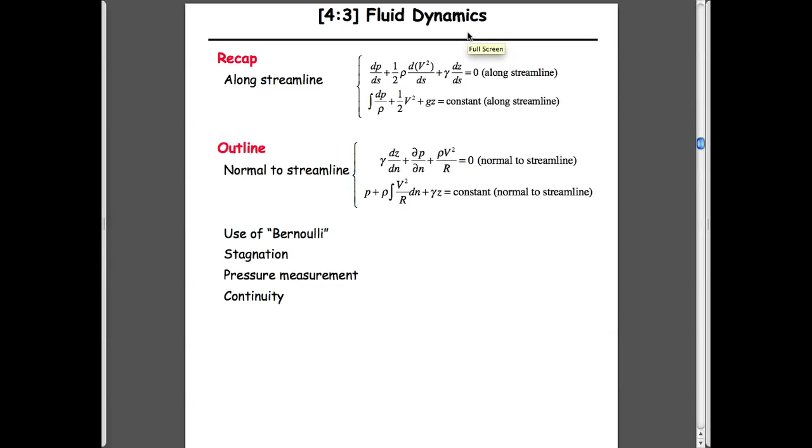So what I want to do today is talk a little bit about Bernoulli, as we dealt with last time. Talk about Bernoulli not in a straight line, but perpendicular to streamlines, and then talk about these individual components here in terms of how we use it: stagnation points for calculating pressures, how we measure pressures, and continuity. So we won't get through all of that, I'm sure.

But let's just regather our thoughts from where we were last time. If you remember, the main event for us was that we figured out exactly what this expression was. And what we could do, if we wanted to, the more usual way to look at this, I think, is if you divide through everything by g.

In which case this becomes 1, and you end up with, if you ignore the integral—the reason for this integral is if unit weight isn't constant with pressure, as it is in a gas, then you have to account for that. But if the fluid is incompressible, which is one of the requirements for Bernoulli, then this integral is just P over the unit weight, right?

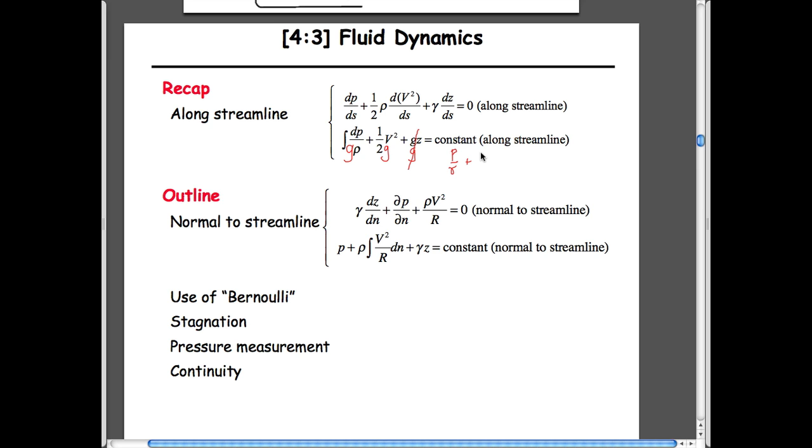And so we can also write this as pressure divided by unit weight plus V squared over 2G plus elevation, Z, is constant.

And so what that refers to is that along a streamline, as you go, you could calculate the value of this magnitude here, the magnitude of this combined term, and they should both equal the same physical amount. So the idea typically is, if you know the behavior at this point, you could calculate one missing parameter at the other location, because you know that they're equal to each other.

And that's what we're attempting to do. We'll apply that a little later to the Jackass video, just to figure out exactly what the unknowns are in that system.

So the other part of what we'd like to do is say what happens if, instead of going along a streamline like we do here, we have some kind of parallel streamline and want to go from one location to another.

And what's different here is, in this particular case, you can imagine that if you look at this, there's some kind of radius of rotation. And in the same way that we did the tennis ball thing—I won't get there—if you think about this, it's physically rotating around a point.

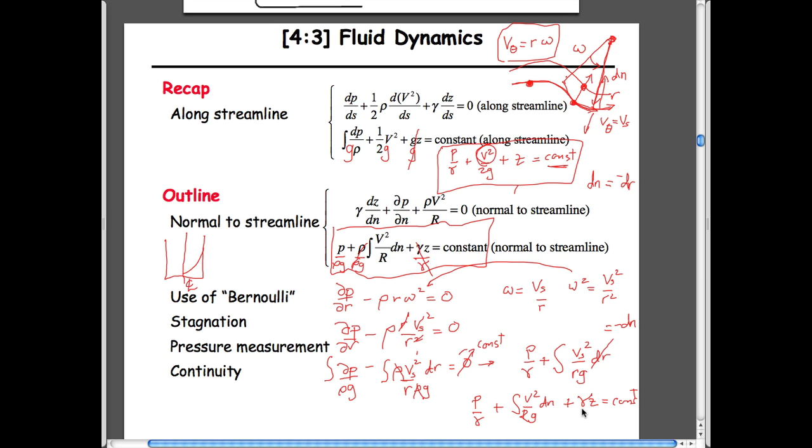Oh, so there should be density there. That's your... oh yeah, okay. So if you divide this through by rho g, divide this through by rho g, divide this through by rho g, which is actually unit weight, then you end up losing this. You end up losing this, and this is p over unit weight. So this is the same. This is v squared over rg, times dn, and this is unit weight. Okay, is that what you're telling me? Yeah. Thank you. Okay, so good. Excellent, good.

And so this is basically the same analogous expression to the linear one, but it means that if we hop from one streamline to another, we can calculate the changes in pressures typically as we go from one to the other. That's basically all it is. So the two forms of Bernoulli that we'll use are for in a straight line, and perpendicular to the flow lines.

The first expressions in each of these are just written in differential terms, so it's rates of change. Basically they say that the rate of change of pressure—if you change the pressure in the system, you also have to either increase the velocity or increase the elevation to compensate for it.

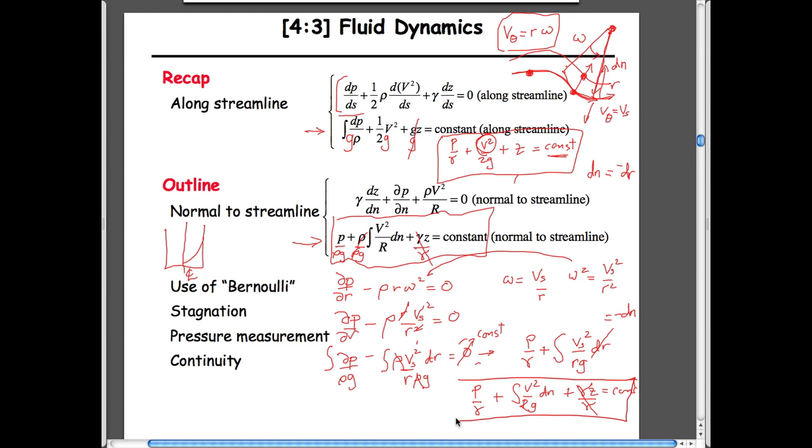So sometimes we might want to use them in differential form, but by far the better use of these is in this format. That's just a simpler way of getting to the end point. This is an important expression for us to use, which I'll explain exactly what it means as we go through this.

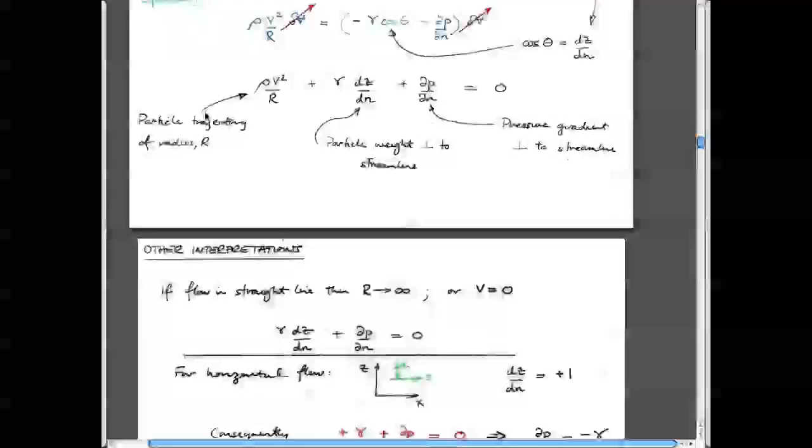So what did I want to... I guess it's in this, right? So let's move on a little bit. It means we don't have to worry about this page so much. But let's look at what this physically means in a physical sense.

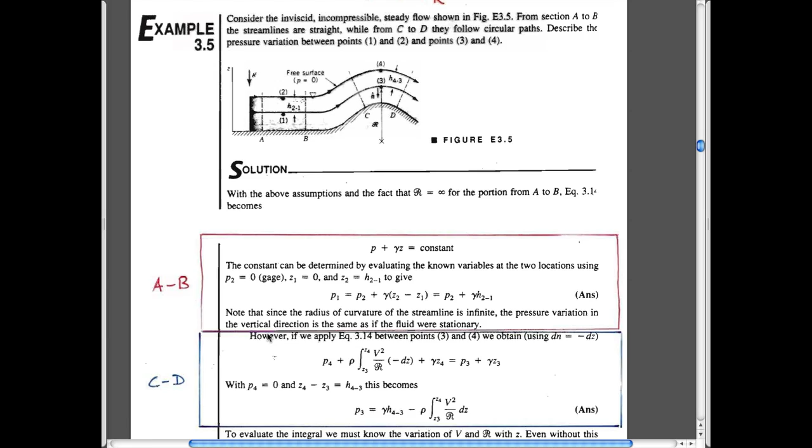So this brings in the analogy of the guy on the ski jump, or the Mini Cooper on the ski jump—imagine you're going along a road in a car, and that's fine. You're happy going down the road. Gravity acting on you is the same as it would be here.

But what happens when you go up over a bump? You know that as you go over a bump, if you go too fast, you get airborne, and so gravity is reduced, because you're being thrown up in the air.

So the question is, how would you calculate, for instance, how the pressure changes as you move up in this fluid? In this fluid, since we know it's just moving in a straight line with no rotation, we would expect that the pressure distribution here would be equal to what?

Unit weight times the depth, as we used it. In other words, in this expression, the rate of change of pressure—we've used this before—dP/dz equals minus the unit weight, which if you integrate, gives us this expression. So if you're in this flowing fluid, not static anymore, you'd expect that the fluid pressure here would vary with the unit weight of water. I'm not going to prove that, but this little proof does here.

What you can do is switch across streamlines, using the magnitude of the radius of curvature to show that. So we're going to do a little example to figure out exactly what the change in fluid pressure is as we go across here. Is it equal to P equals H times the unit weight?

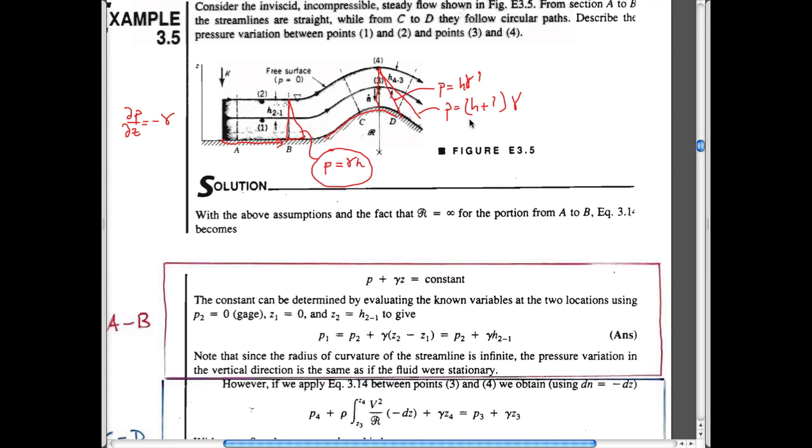This little piece of the notes explores that, but let's do it in more detail, because I think this is important. This is to try and explain using the expression we just got—well, we divided through by unit weight, but let's not do that here. So this is the expression we just got.

What we can do is write that expression on one streamline—this is one streamline that goes here, and a parallel streamline going through here. Our quest is to figure out exactly how pressure changes as we go from one point to another. Our reason for doing that is, if we know the pressure here has to be atmospheric—pressure 4 is atmospheric—if we know this, then hopefully we can figure out exactly what P3 is, the pressure at this point.

So what we can do is write Bernoulli's expression with this curvature in it for these two points. We can write it at point 4, which is just this expression here—this is the expression we just derived.

So it would be the pressure at this point, which we actually know is atmospheric, but let's not worry about that yet. It would be the density of the fluid that's flowing. It would be the radius, average radius of curvature. So some average radius, from the center of curvature here to some middling point.

We can get the magnitude of this integral from this. In fact, what we'd like to do is call this R4, and this R3, right? These are all on a circular arc, so we can get this.

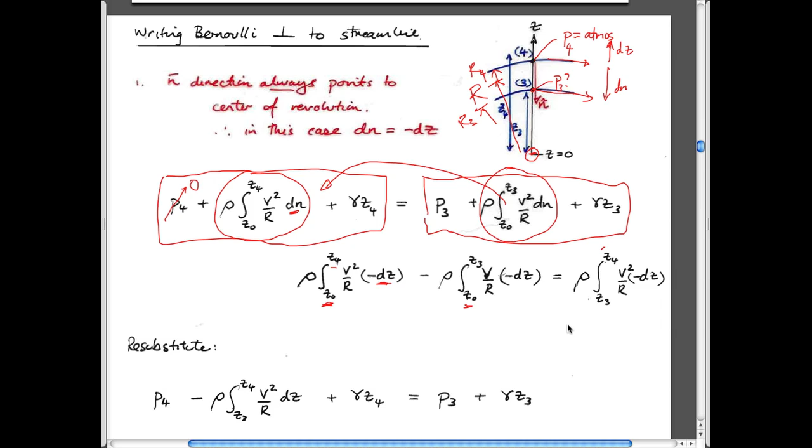So if you have some function and you're evaluating it between z3 and z4, then the integral from z0 to this point here is just the area under this curve. So in other words, the integral z0 to z4 is just this ringed area.

The integral z0 to z3 is this area. I know I can't do it much better, but you can probably do this better. This is the integral z0 to z3 dz, whatever that function is. And so subtracting them from each other physically is this area here. That's all it is.

So it's the integral evaluated between these limits. It's good to get a physical feel for what this integral is. That's all it is, it's adding up the area underneath that distribution. I wish I had some better colors, but I hope you get the idea.

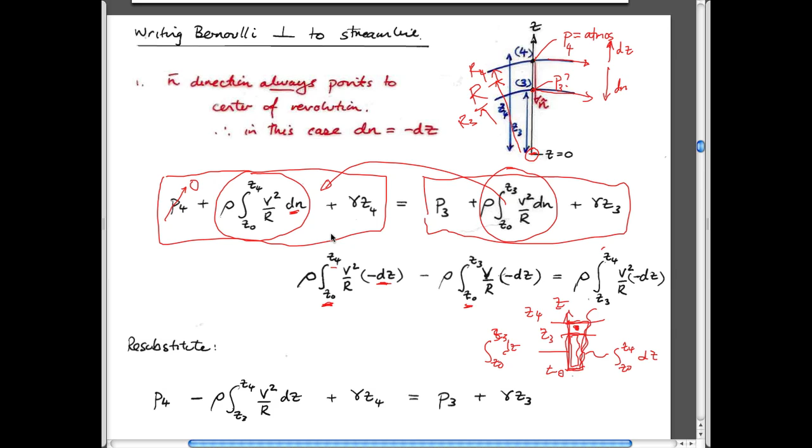So we can replace these two integrals with this one, and if we do that resubstitution, we end up with this expression here. What else can we do with this?

Well, we said that this is on the upper surface. In other words, remember it looked like this: this was point 4, this is point 3. Pressure at 4 we said was equal to atmospheric, so this is equal to 0.

We don't know what this is. This is what we're interested in finding out. And so what we can do is rearrange it. We know that P4 is 0.

We know that Z4 and Z3 are just different by this height, which is H3,4, right? It's just the separation between those places in the Z direction, the vertical direction, which we have here, which we know if we know the geometry. And so we can resubstitute it in terms of this one parameter we want.

And if we use that, then what we see is that the pressure at that point is equal to the unit weight of the fluid times the depth, which is normally the case if we just have a static fluid, right?

So this is point 4, this is point 3, and all this is saying is that if this is pressure, then P equals gamma H. That's exactly the same as a static fluid, but there's this extra term added onto it.

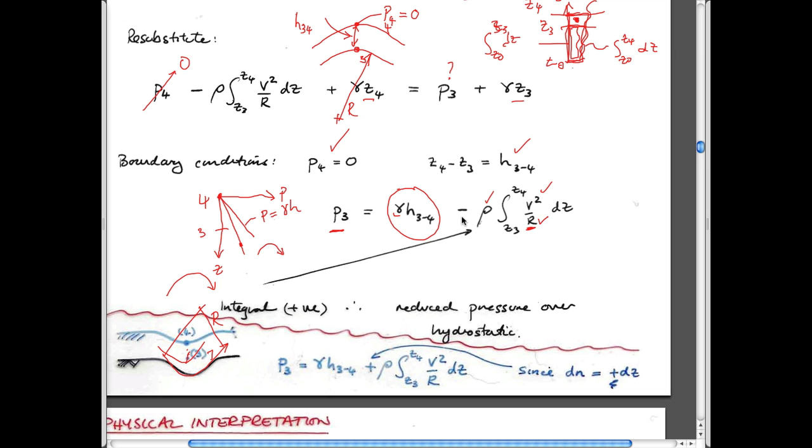And so in that particular case... didn't want to do that. Well, I guess that solved it.

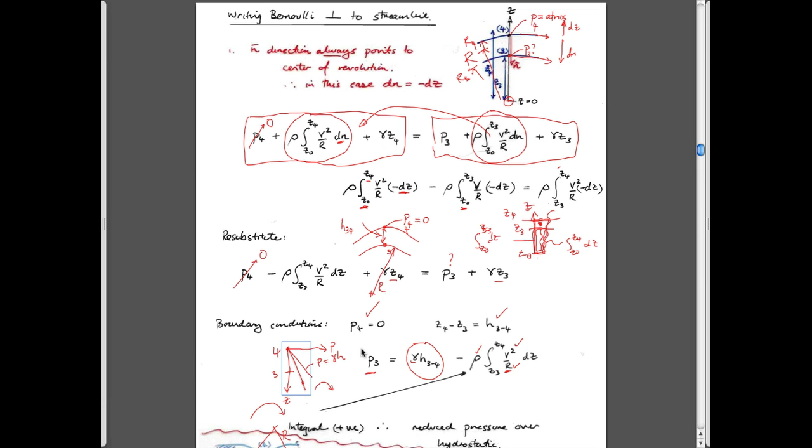Full screen. And so if that were the case, then the magnitude of this term is positive. And so physically what that would look like would be this. So this would be for going into a hollow and coming back out, and it kind of makes sense.

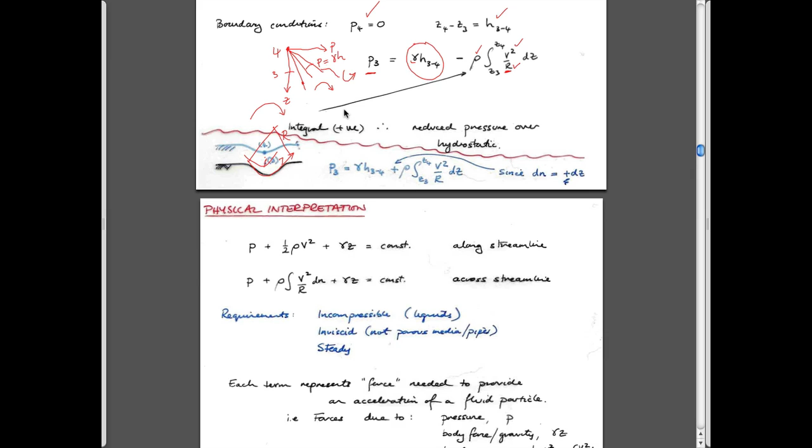What we haven't said is what the fluid pressure distribution would be if you are just going parallel to each other. We've alluded to the fact that it might be equal to the static case, but we haven't really shown that. But now we have enough information to show that, because we know this is a function of the radius of curvature.

If the flow is horizontal and the streamlines are parallel to each other, then the radius of curvature is infinite. So when r goes to infinity, this term disappears because it's vanishingly small. And if that's the case, the pressure distribution will just be the linear pressure distribution that we have in a static fluid. The fluid is not static, it's flowing from your left to your right, but the pressure distribution will be that.

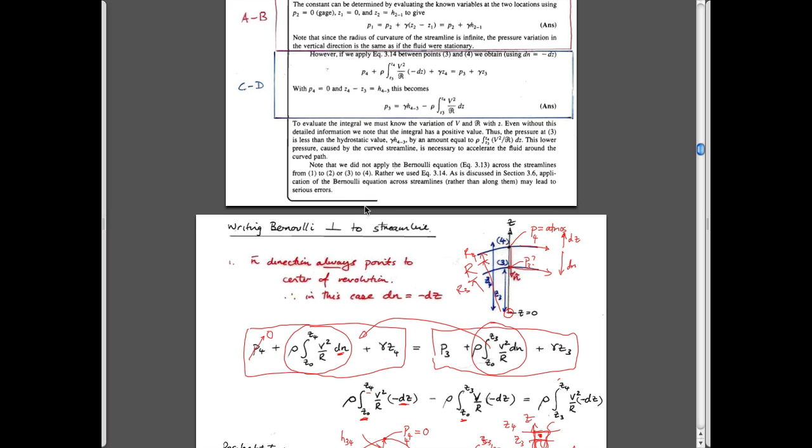And so that's why this expression, while not particularly straightforward, is an important expression for us to use. This is the expression that we've used, this is all we've used, so make sure that you realize exactly what this means.

The important things to realize, I think, are that the coordinate system that we use is always this, that there's a z direction which is always upwards, and there's a radius, which is always perpendicular to the streamline.

There's a velocity along that streamline, which is always v sub s. If you want to, you can call that v sub s. It's not the velocity perpendicular to the streamline. This is one streamline here, this is another streamline here. It can't be the velocity perpendicular to the streamline because there is no velocity perpendicular to the streamline, right?

If you're going in a car at 5 miles an hour, the velocity of the car perpendicular to you is 0, if you're attached to the streamline. So the flow direction is along the streamline only; there is no velocity in this direction. This is the streamline velocity, and this is the radius from the center of rotation, the angle of rotation of this thing, which is this point here. R is always positive, and the direction is always perpendicular to this.

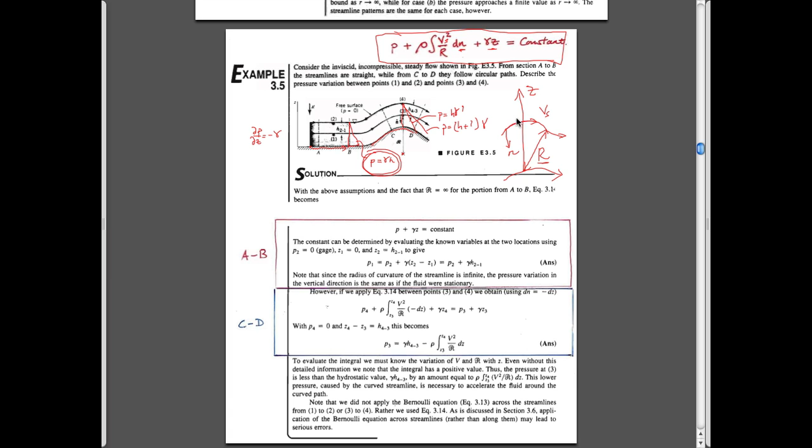So it's a little bit complicated, but if you remember those tenets: Z is always vertical, N is always perpendicular to the streamline, it always points towards the radius, towards the center, always. This is always positive, this is a streamline velocity, and this is the density of the fluid.

And so given that, basically what you can do is hop between streamlines to be able to figure out what the fluid pressure distribution is.

And just to recap, if you look at pressure with depth from the surface, this is the pressure for R equals infinity, when the pressure distribution is equal to H unit weight, exactly the same as in a static fluid. This is the distribution if you're going into a hollow and coming out, and this is the distribution if you're going over a hump. And you can kind of rationalize those.

That's why we showed the mini and the ski jumper, because it's really analogous physics. You're going around a bend, you're being forced into that bend. You can imagine that if you're going off a ski jump, I never have, your legs will compress because you're being forced on a particular arc. That's exactly the same as this. You can imagine that if you're going into a hollow, your knees would compress, and basically the weight of your body is increasing because G is increasing on you. That's basically what's going on, okay?

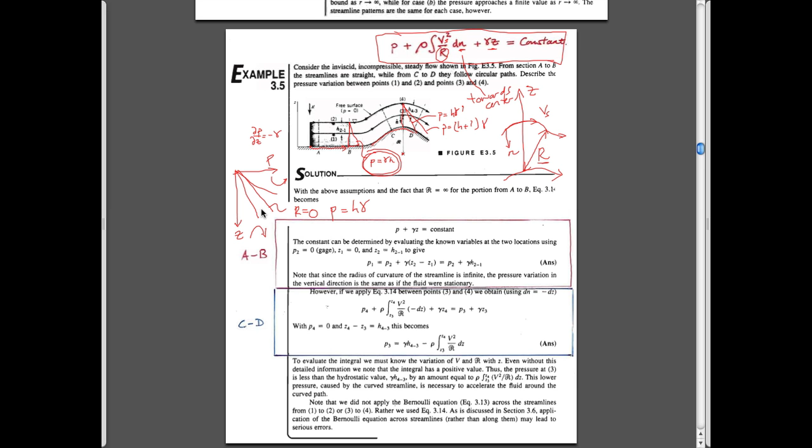So not a simple concept, but one that's kind of important to what we do. So I'd encourage you to look at that at your leisure just to see that you understand it. Okay? Everyone okay?

Questions? No. All right. So in all of these cases, what we're going to do is we can either write along a streamline, or we can write perpendicular to a streamline an expression. We know that it's constant, and so we can write the equation at two points. Those two points are either along a streamline, or they're going across streamlines in the case we need to deal with it.

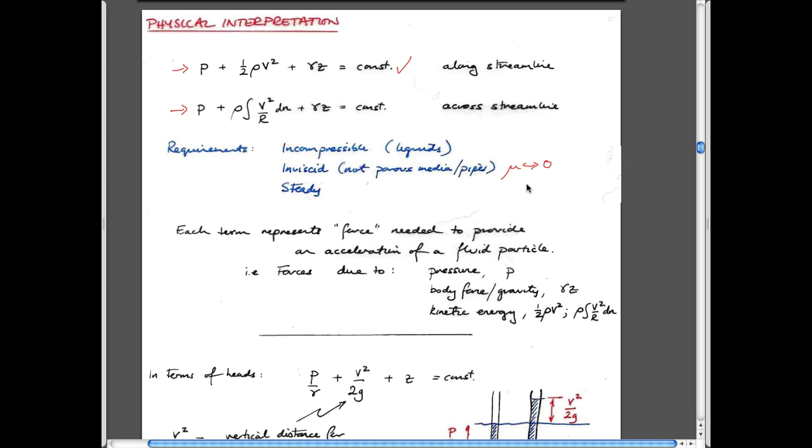We talked about the conditions that are required for Bernoulli to be true. It has to be incompressible, which usually means it's a liquid, but it's also used for gases. We'll use it for gases as well. It has no viscosity - inviscid means viscosity is equal to 0. It depends on other conditions in the system, but it's easy for us to use it in liquids and assume that they are not very viscous. You wouldn't want to use it in lavas or magmas, or in treacles and honey, but certainly in Newtonian fluids we can use it.

And the other thing that was the requirement was steady state. Steady state means that if you look at any particular location at a snapshot in time, and you come back to that, take a snapshot ten minutes later, the conditions at any one point haven't changed. Doesn't mean that the conditions everywhere are the same, but they don't change with time.

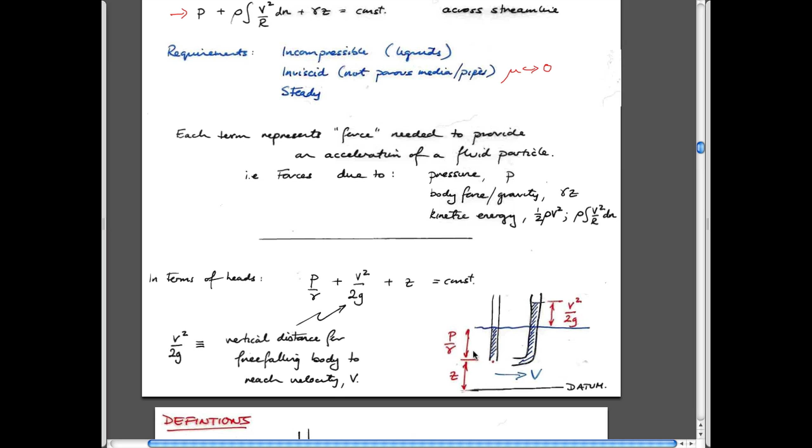So let's look at some applications for this, just for the linear, along-a-streamline Bernoulli equation, because that's by far the most useful and most thoroughly used one that we'll deal with. Don't know what this is for. I guess I didn't want to do that.

So the idea here is that the physical meaning of this is that the sum of the pressure head, the velocity head, and the elevation head, as they're often referred to, are constant on any streamline. So if you look at a streamline going through a fluid, this would be one streamline - you can write the magnitude of that expression here, and they should both equal the same thing. That's all we're going to attempt to do with it.

The physical meaning of this is that if you look at the velocity at this particular point, you can look at the behaviors - the pressure head, which would just be the height of water above this little piezometer tube, the elevation of it above some datum. Remember, in all of our stuff, z is positive upwards, and you can choose any datum you want. You could choose this one, you could choose one up here and go down from it - it doesn't matter, but z is always positive upwards.

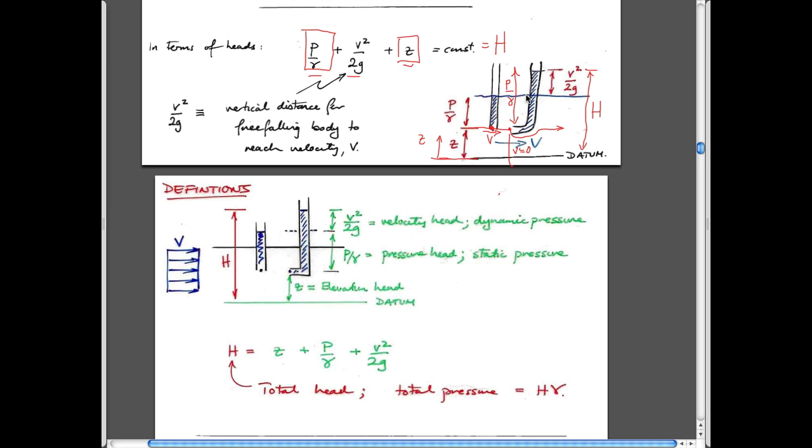Try and get a physical appreciation of exactly what's going on in this system—that's really what we're attempting to use this for. And we can always evaluate this. Typically we'll make this magnitude equal to some total head, and our interest is in being able to choose locations at different points, right in front of here, and also right up against this tube, and rationalize exactly what the pressures are at those points.

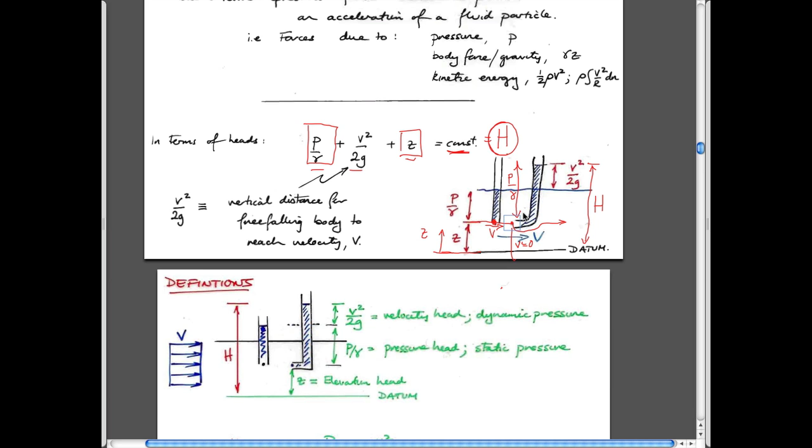The point we've just made is apparent if you look at what's referred to as stagnation points—sometimes called stagnation streamline. Along this streamline we have some velocity, and a long way away from this ball before it hits it, you'd think the velocities on all streamlines are probably about the same. But the one streamline that intersects this ball and then gets shot in two different directions, one that goes around here and one that slips around here...

...means that the velocity at this point, as it hits this, goes from some relatively big velocity, probably very similar to the velocity along here, to 0 because it's stopped by the ball. So the stagnation point in this particular flow is exactly here, and it replicates the fact that the velocity goes from some magnitude to some other velocity, which you'd expect to be 0 because it's basically a fire hose on a wall, and you know the water isn't going through the wall. So that's something we can use.

So what that means is that the velocity of the fluid flowing into it all of a sudden becomes 0, and the magnitude of this velocity head has to get transferred onto one of these other components. It can't get transferred onto the elevation, because you have a big velocity here and a 0 velocity here, both at the same elevation, so this can't change—it has to stay the same. So the only thing that can happen is that the fluid pressure goes up.

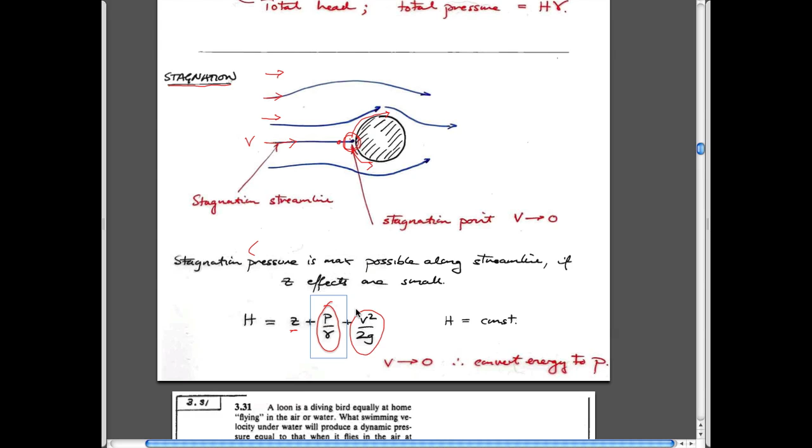In other words, you have a fire hose on a wall—the fire hose hits the wall at the same elevation, which hasn't changed between just before it hits the wall and when it has hit the wall. Since the velocity goes from a big number to 0, it has to be shed onto one of the terms, and the only term it can possibly be shed onto is the pressure term. So you get pushed over by the fire hose because you have a pressure that was atmospheric when traveling at a very large velocity, and it becomes the v squared over 2g term—all of the momentum of that jet is transferred into a pressure on your chest or on the wall. That's actually the mechanism, if you like.

If we go back to where we were before, if you remember this—you'll remember our Jackass friend, right?

I guess I might have to see if we can do this. Try to refresh it, I guess. Well, you know it, you've seen this before. Don't know why it doesn't want to work. Just thinking. Come on, so.

I'm Dave England, and this is the Fire Hose Rodeo. Okay, that's our guy, so it's the fire hose rodeo.

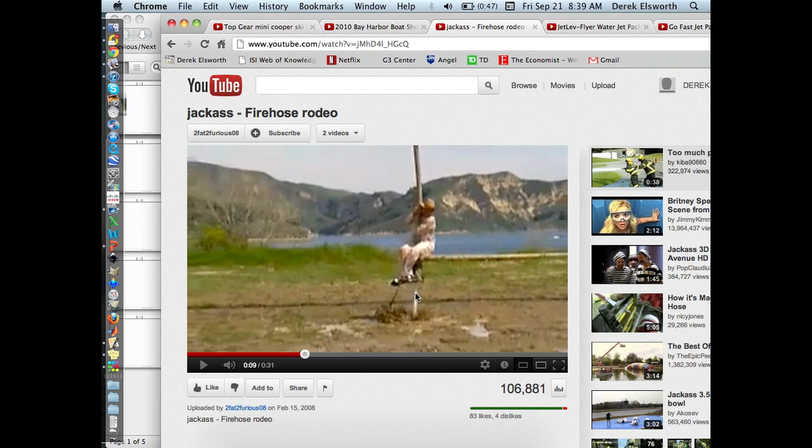I think I can't draw on this, but this is a guy sitting on top of a hose, with stuff squirting out the bottom. You could calculate how much velocity you need out of this system to keep him up. It's a relatively simple calculation, and you now have the tools to be able to do that.

I won't play it, you can play it at your leisure. But if we look at this predefined component here, let's do it. Let's calculate exactly how that might work, just for him. So where are we?

Okay, so what are we going to do with this guy? Well, instead of thinking of the hose coming this way, let's think it comes this way. So there's some flow rate coming in here, which we'll call a velocity. What we could do is evaluate the behavior by looking at, for instance, just this point here.

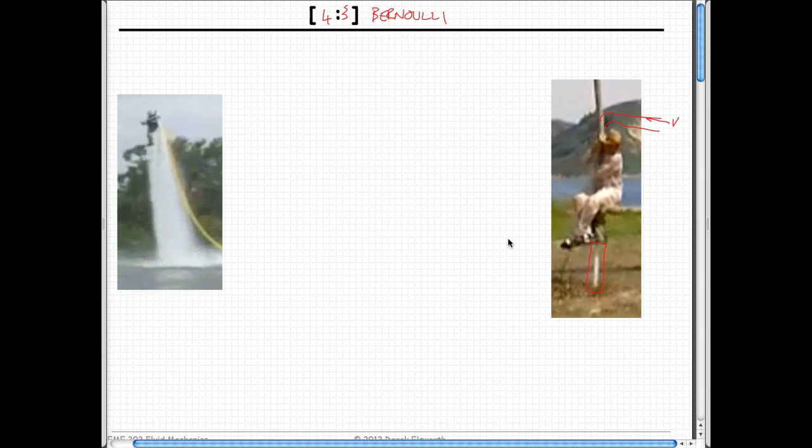Let's think of this point as equal to a free body diagram that does this. So this is Z1, this is Z2, this is point 2. I know you don't have Mr. Jackass to draw on, but these are the points. We know that the elevation we want to have going upwards in the positive Z direction, and let's call this just height H.

So let's just do a free body diagram. If we wanted to represent this, this is the column of water. Let's say the column of water has some cross-sectional area A, and is of height H, and it would have a weight of water, and it would also have a weight of the Jackass sitting on it.

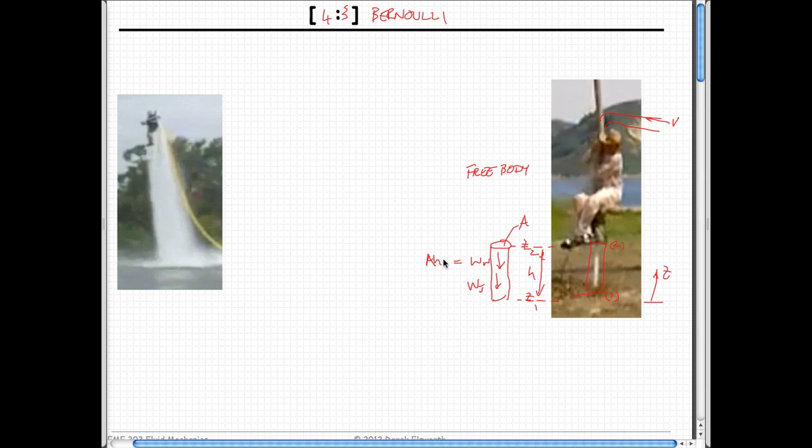So what are each of these? The weight of water is area times height times unit weight of water. And what's the weight of Jackass? Well, let's use this simple expression that this is the unit weight of water times the volume of Jackass. Pretty much true, right? We float in water, we're almost neutrally buoyant, so our density - we're made almost all out of water in many respects, except for our bones - but we're essentially the density of water. So that's just easy.

And so this has to be resisted by a pressure coming from the hose, by a force actually, which is equal to the pressure times the area on which it acts, and this is uppercase P, which is a force. So we can write an expression that weight of water plus weight of Jackass equals P, which is unit weight of water times the height of the fluid column times the area of the fluid column, plus the volume of the person, is equal to the fluid pressure acting at the bottom multiplied through by the area.

Okay, so what else could we do? We could divide both sides through by the area, and we could divide both sides through by unit weight. If we do that, we end up with pressure divided by unit weight - the pressure at point number 1 - is equal to the height times A over A, plus the volume of the solid, of the person rather, divided by A. So this is just 1, obviously, right?

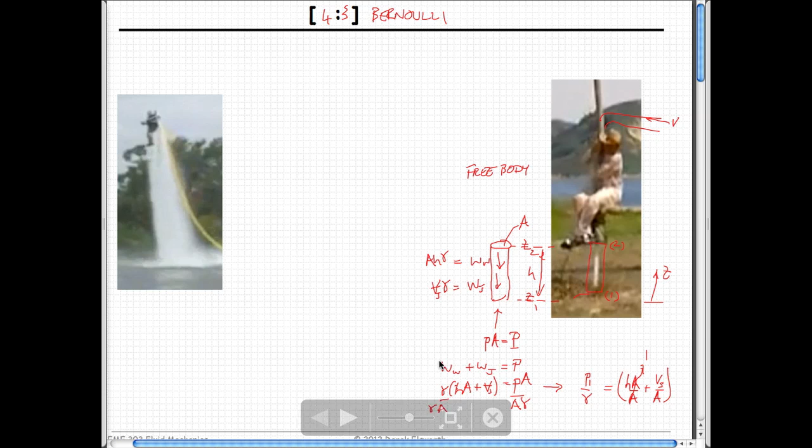Okay, so what we'd like to do is figure out exactly what the pressure is acting at this point. So what we can do is write Bernoulli at a couple of different locations. We could write it at point 1: P1 over gamma plus Z1 plus velocity at 1 squared over 2g is equal to some number we don't know. And we could also write it at the point where it impacts, P2 over unit weight plus, I guess I did this wrong, right?

The elevation is equal to h, and the velocity we don't know. At location 1, it's impacting this, turning all its velocity into pressure basically. So what are the components here? At this point, we don't know the pressure.